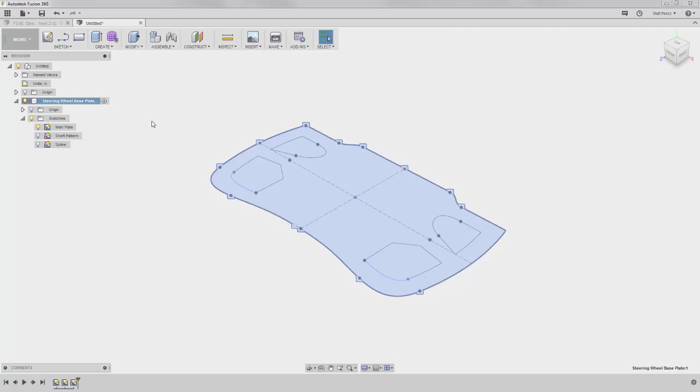From the toolbar, or by pressing the E key, start the Extrude tool. You can also press S on the keyboard, and Extrude will be on the toolbox by default, or use Press Pull from the marking menu. Any of these options are valid, it just depends on how you prefer to work. As we move forward in this course, I will start offering fewer comments about alternative ways of accessing tools, and simply tell you which tools are needed.

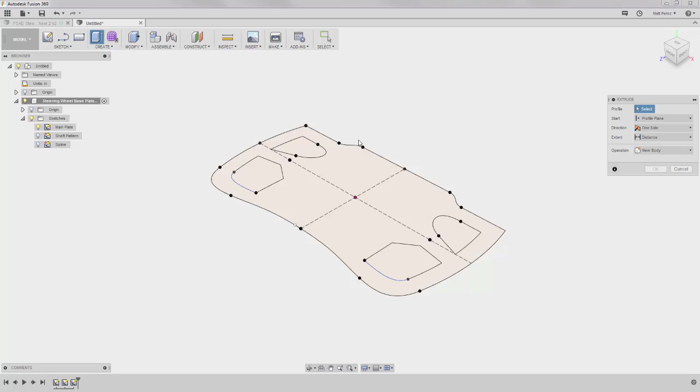For the extrusion geometry, the profile that we want to use is the main plate sketch, and we will leave the 4 profiles unselected to remain open. Once the profile is selected, click and hold the left mouse button on the arrow and pull it up to create the extruded feature. As you pull up, notice that a dimension appears to show you the height of the extrusion. Type 0.375 in the value window to set the final extrusion height.

While we are in a tool, let's look at a few options in the dialog box. For this feature, we will start the extrusion from the profile plane. We also have the option of setting an offset from the profile plane to begin the feature, or even selecting an object. We can also choose to extrude in one direction or two directions, with individual heights, or making it symmetric.

We can also extrude up to another object or through all of the model. We can enter a distance like we did in the mini dialog box, and enter a taper angle. We can choose what sort of operation we want. We can add geometry to an existing body, or cut geometry.

In this case, we want to create a new body because the component we need is already active. If we started a new file, we could create a new component while we were extruding by using the New Component option. We'll select OK to create the solid.

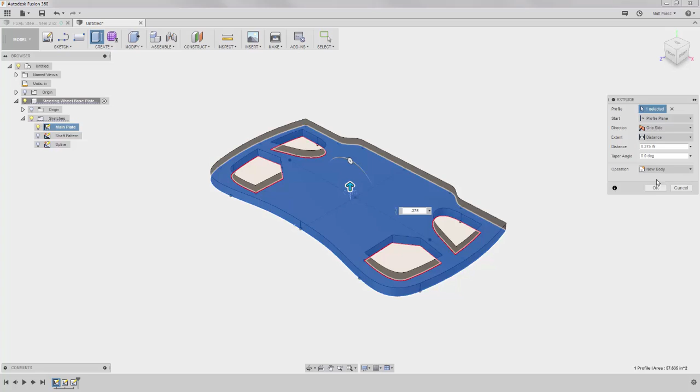When the extrusion is created, the main plate sketch will be hidden by default. It can be turned on at any point in time if we need it for additional operations, but we will leave it off. The next feature we need is the shaft pattern.

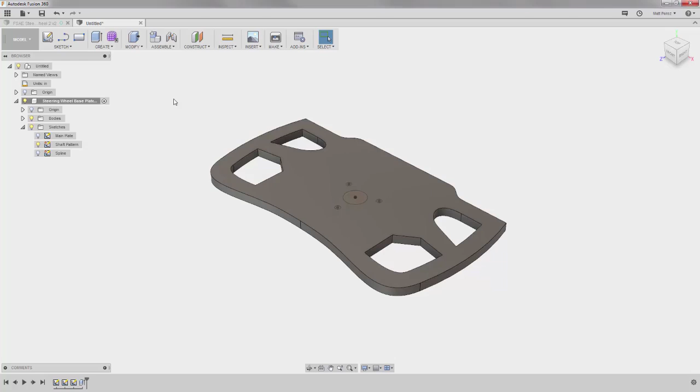Turning the shaft pattern sketch back on, we can hover over the profiles and see that they will highlight, though at times this can be a bit of a challenge. Starting the Extrude tool, it becomes more difficult to select the profile because the top face of the extrusion can be used as an extrusion profile.

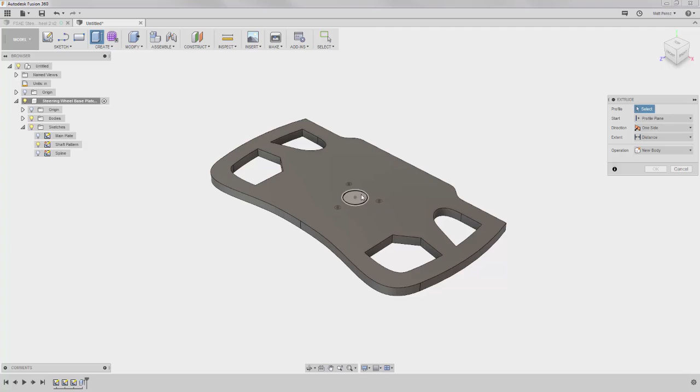On the right end of the toolbar is the Select Options pull-down. At the bottom, I can change the filters to focus on sketch geometry, and that makes it much easier to select the sketch profiles. Another option would be to rotate the model so you could see the sketch profiles directly, but that's not always possible in a complex design.

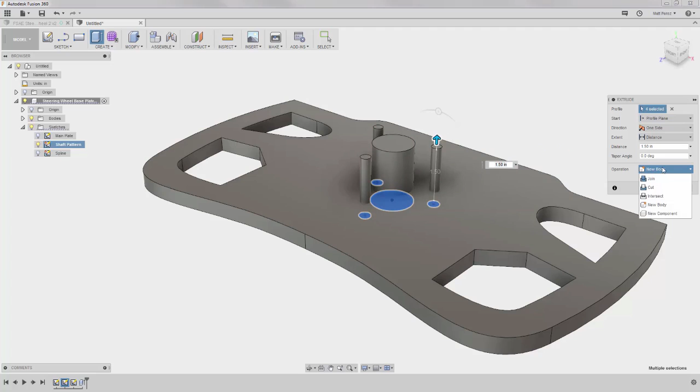By default, Fusion 360 will want to create geometry away from the body, adding volume to it. I will click and drag the arrow back through the body, and it will automatically convert to a cutting operation. Like the first extrusion, we have the option to override this to make the extrusion a join operation. We can also switch to intersect so that the remaining geometry is the combination of the two features.

For this design, we will go with the cut operation and set the distance to through all before selecting OK to create the feature.

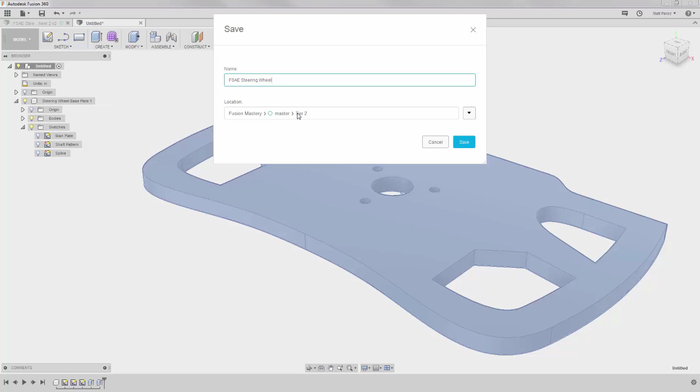With this feature complete, let's activate the top level of the design and save the file, giving it the name FSAE Steering Wheel 3. A quick note about versions and the differences between how we handled the Steering Wheel 2 and 3 files. When we created the new design for FSAE 3, we didn't save that immediately.

We started to create the model instead. When we created the FSAE 2 file, we saved it first before we began to edit, so it has an additional version. This is a best practice when creating a new file from existing data, so that if need be, you can close it without saving changes you made after the initial creation. I can see this difference displayed in the data panel, which shows the version count for each file.

While we are in the data panel, we can use the settings tool to change the display of the files from grid to list. Since we will be creating a series of files with the same name but a different number at the end, this will help make it easier for us to find the correct file.

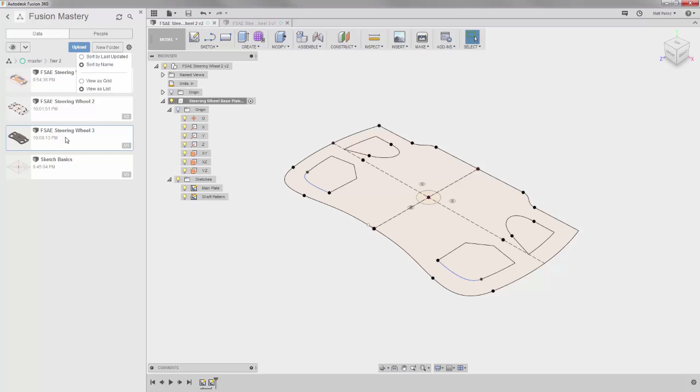You can also change the sort order from by name to last updated. This is another effective way of more quickly finding the files that you've actively been editing. I'll go ahead and close the data panel and be ready to move on to the next steps.